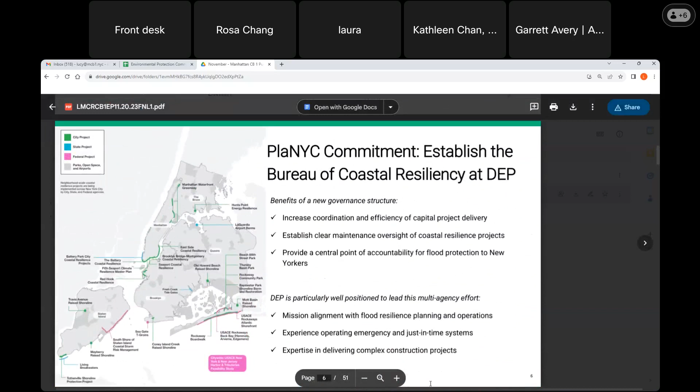Jordan, I hate to interrupt, and I don't want to set a precedent for jumping in with a question, but before we just leave this new established resiliency bureau, can you just give an example of how this is going to work?

Sure. So in areas where there is not an existing project, I think we made the decision that we didn't want to upset lots of ongoing work or years of entrenched agency knowledge. I think for the case of FIDI Seaport, for example, there's not a scenario where that moves over to DEP tomorrow.

Okay, thanks a lot. Yeah.

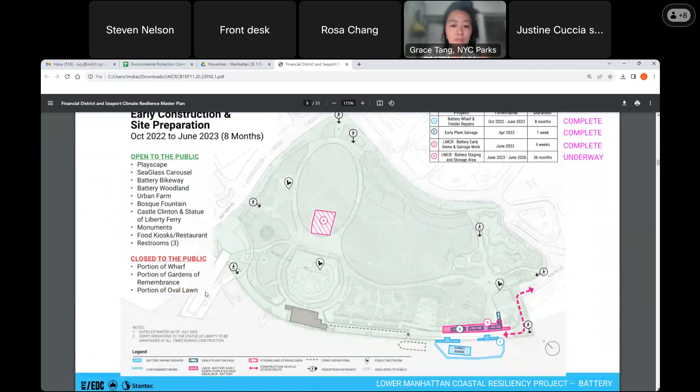Not going over this one? Yeah, that's what we were just - you want to do it one more time because I think that's helpful with the map up. Yeah, so basically, right in front of the View Restaurant, in the beginning half of this year, we...

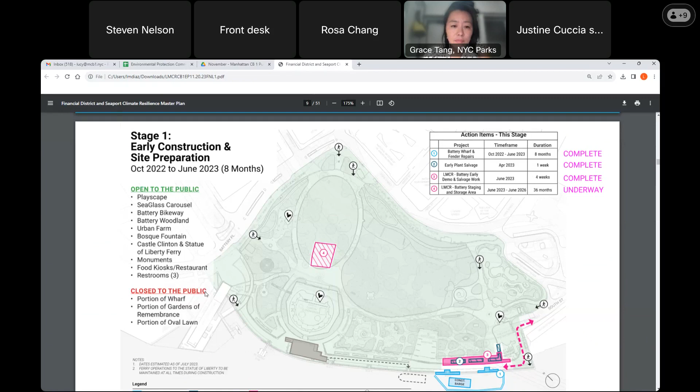completed some structural work under the wharf to bring those existing timber piles up to a level that will be able to service Statue Cruise operations. And then in that magenta area, we salvaged all the existing granite that was going to be in conflict with where those Statue Cruise operations were going to be happening during our first phase of construction. We moved those over into a small storage area we set up in the oval so we can have them stored, ready to be processed and reused.

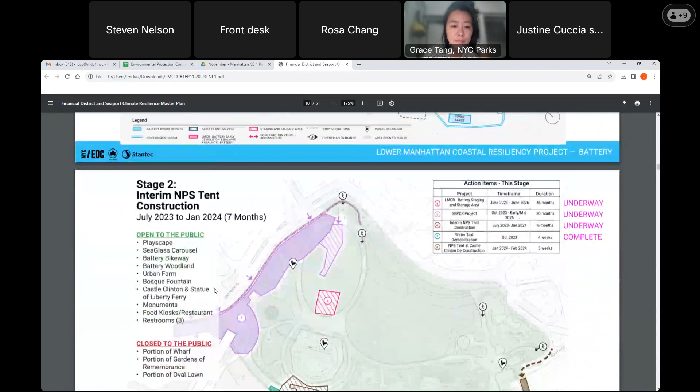The next slide is what you'll see out there today. This is from the middle of the summer and how the park will look through January when we're going to start construction. The National Park Service tent is underway - we're going to wrap up by the end of the year. We've had that staging area set up, the water taxi has demobilized, and the security operations are operating out of an existing tent.

One thing we want to point out is through all the efforts with the Conservancy and the stakeholders, we've managed to keep everything open during these operations, keeping some access to the wharf where we can, along with all the other amenities in the park.

Do you mind, because I think for most people they wouldn't be able to understand all of the legend that's being shown - can you just point to what everything is and we can go over it that way? Yeah, so this brown area here is where the current National Park Service construction is going on.

This is where we did the salvage work to get all the granite out so we can reuse it in the rebuild. This water taxi was removed in October.

This is the tent that's going to be eventually taken down so we can start our phase one work. We have our small storage area where we've stored the granite we've salvaged so far. We're going to be expanding that for the larger overall salvage effort beginning of this year or beginning of next year.

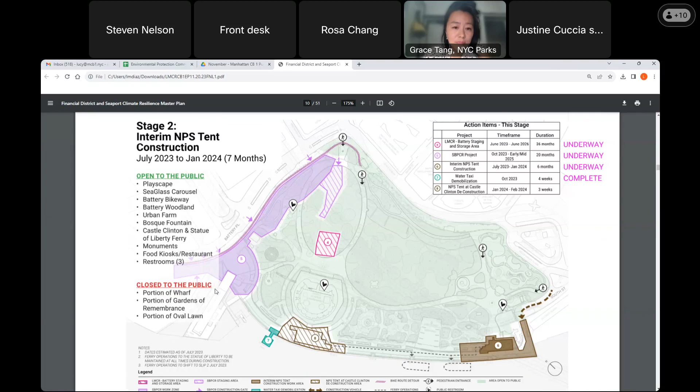I'm going to ask because they did approach the community board and ask for adjustments, but it looks like there's been no adjustments made for the National Park Service fencing and things like that. We can't really speak to that because it's not under our control from the National Park Service perspective.

For the conservancy, in terms of taking down some screening so we can keep the views open for the public when they're in the Bosque, we did make some adjustments working with the patio while they were out there.

Before we move on, this is just the early salvage work we were doing, taking all the granite capstones. We took these benches, we took the granite cladding along those walls, all to be repurposed in the new rebuild. This is just the storage area that was set up at the bottom. If you go to the next slide.

See the National Parks tent construction. This is looking at the tent construction from the Bosque area. They've kept their fencing back behind the Bosque, so the Bosque is accessible. This is looking from over by the playground, coming in. They kept the fence as far back as they can to safely do their work, but still maintaining access to the views. The front door.

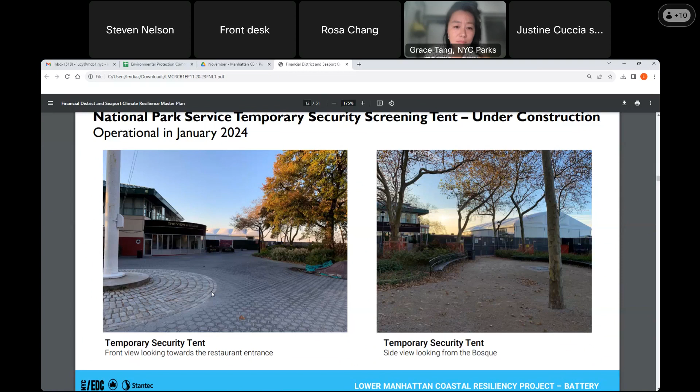Why don't we go through the whole Battery and then ask the questions, if that's okay.

Next slide. This slide shows what our footprint will be from January through the middle of 2025. This is us taking our first phase of work from the East Coast Memorial, the Pier A, starting the demolition of the wharf, then eventually pile driving, rebuilding the structure, redoing all the drainage in the pink area, and redoing all the hardscape and landscaping.

Just to point out, I know there are a lot more other colors than green right now, but for the most part we've managed to keep open as much of the area that was open in our previous phases of work, open to the public, minus access to the waterfront, because we're going to be ripping it out and rebuilding it.

Can you do the same thing you did at the other slide? This pink area is our first phase of work. Sorry, I'm not colorblind, I think that's brown. Yeah, the brown area is where National Parks is going to be demolishing their tent and eventually rebuilding it.

The hatched area here is the Statue Cruises operations out of that temporary tent being constructed right now in front of the view. The darker blue areas are the DOT resiliency project that we're coordinating their access throughout the park. There's some renovations to the field house going on by Parks over by the playground.

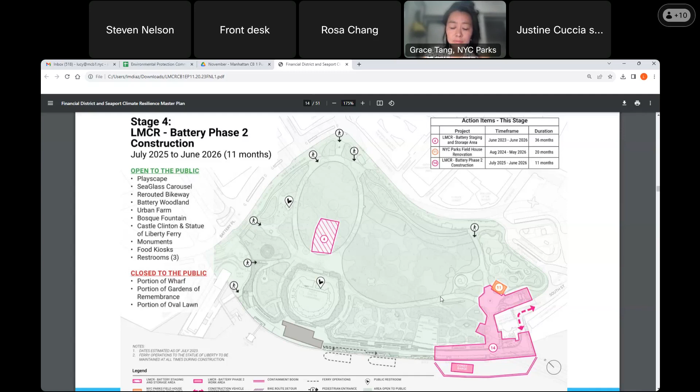We've been coordinating with the operator and Parks Revenue to ensure everyone's up to date. We'd certainly like to have an understanding about being up to date versus the ability to operate, which isn't necessarily the same thing. We're coordinating with them. What does that mean? They're negotiating.

Can't hear, sorry, say it again. Go ahead and repeat it. Sorry, I don't need you to repeat it. That's it. Would you like some water?

It will be very difficult for the restaurant to operate, if not impossible. The pink represents everything happening all at once, but not all of that activity will be happening at the same time. There may be a situation where they don't have safe access, or access but not safe access for fire department requirements. Also, it won't be pleasant to be there because of the heavy construction around it, so the operator may be unable to operate or may decide not to.

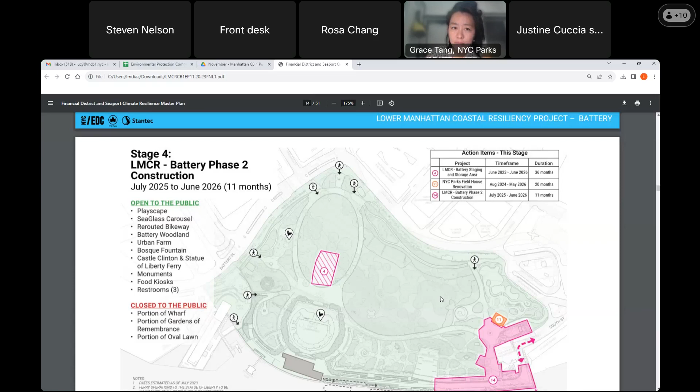In which case they're interested in negotiating some kind of alternate arrangement. We still need to work through this. I'm going to go back one slide, and then it's all yours.

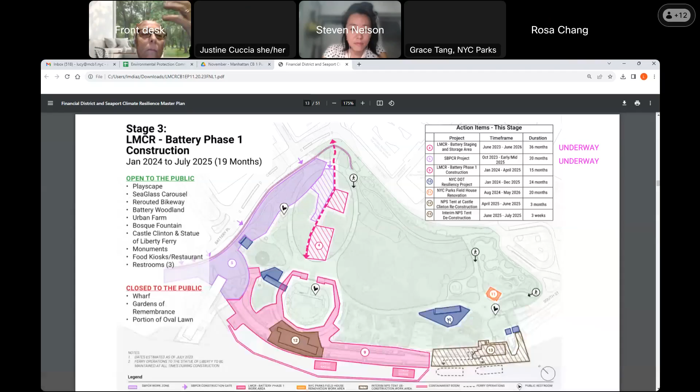Jeff, on the last slide, the blue area was described as the DOT resilience project. I'm sure you must have explained whatever that was in the past, but I don't remember. Based on the locations, it looks like it tracks the FDR battery underpass. So my first part of the question is, can you describe what that project is? And the second part is, will that underpass be closed?

Yeah, I think they were at our meeting a couple of meetings ago. We can invite them to present.

All the blue areas, is that all about the battery underpass, or just - I mean this building number 10, for example, they are all colored blue and they all say New York City DOT Resiliency Project, but I was curious what - those basically represent some of the different ventilation shafts that are within the park and where they have access to.

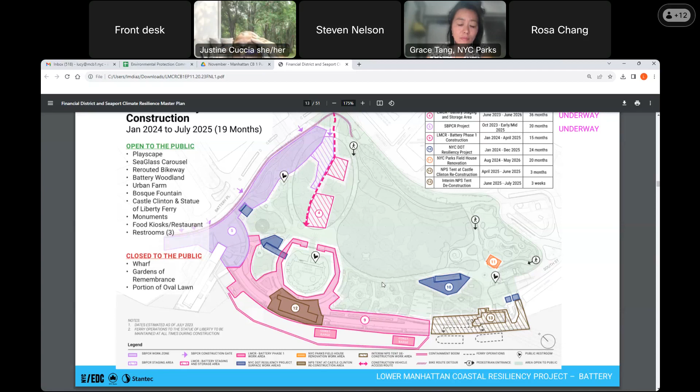Is this something - it's very difficult to read. I'm sort of curious why, given you're in construction, we can't see - let's say we'll set a construction plan - but some sort of construction document, so we understand what it is we're getting and where you're at in the process. These drawings are highly schematic, they're basically flat, we have no idea what really is being proposed, so I might recommend that on the next round you up the ante a little bit and provide construction documents that illustrate some of this, but it's very hard to know what a triangular shape means in terms of its height.

Also really missing from here, and to Wendy too, in addition to a more elaborate definition of all of these different colors, is pedestrians' path - how people are moving through this is completely illegible. I don't know, somewhere it's there, but I don't see it. I think it would be very helpful, not only here but again, made public - and maybe it is, I haven't been down in a while - but I just think we need to know how do we move through this space for the next 2 years and onwards. So looking ahead, that's going to be a critical part that's missing today.

Do you think you could send us those? I mean, you must have pedestrian flow - full circles with the arrows. I think what we're looking for is just a drawing of the whole park just showing the open pedestrian paths, that would be probably handy. And then maybe a construction document of the plan showing the different phases of the project, and what these things are - 10 and 12 and 13. Right now we're reading patch colors without any sense of really what it is we're looking at.

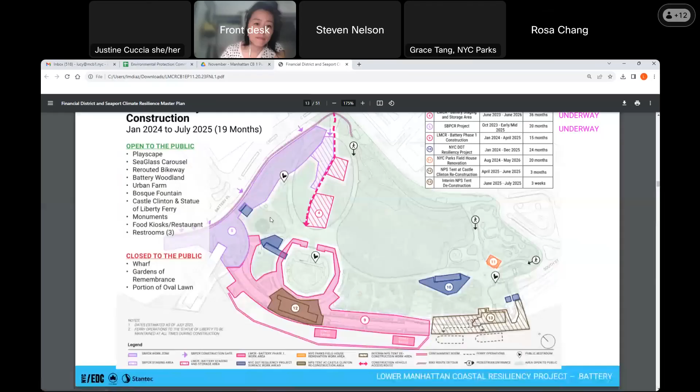So I was going to follow up on what you said, Alice, about identifying what's going on in the picture or schematic, because I'm still trying to figure out where the restaurant is. It's not 10, right? Where is the restaurant? It's over by where the bathrooms are, where 11 is, the field house. That's the bathrooms behind the restaurant there.

So if you look forward on this diagram, it's confusing how the restaurant's going to operate because it's in between what you see as a bathroom marker and the two blue markers, which are noted as surface work areas. Yeah, and there's just no way in.

No, I get that. And what I also don't understand is the pedestrian flow as put forth. You're going to have work at 11, work where the little blue dots are, and by 10. So where are people going to walk to get to the bathroom? That's in the south, the far right corner of the picture as I'm looking at it. And at the top, when you come in on State Street, you're going to have to go around all the construction to get to the bathroom. And again, with the signage, as Wendy was saying, it's a long walk to get to a bathroom and it's going to be very confusing.

So yes, paths are shown here, but we could certainly show you a diagram next time with lines traced on top of the park paths, showing where you're looking for people to go, and also identifying landmarks that exist. If they're going away or moving, that's fine to tell us. But at least for people like me who don't understand where things are, even though I'm familiar with the area, putting some labels, even a number or a letter, and having it on the side as a legend. Thank you so much.

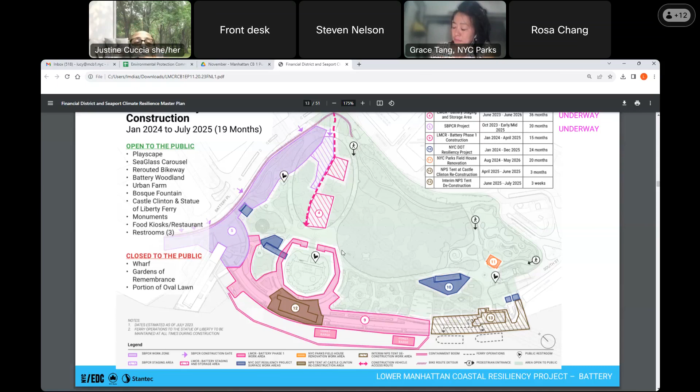Ask the battery team to do a separate presentation to this committee. We've done this in the past. Clearly we're going to need it here. There is a lack of information, that's understandable. It's great that you've included it, and I know you've adjusted things to do so, but I think we'll need more, and at that point we can dive a bit more into detail. So maybe in the not too distant future we can ask you to come back with the plans, with information that's missing tonight, and maybe entertain a few more questions, but still open for questions now.

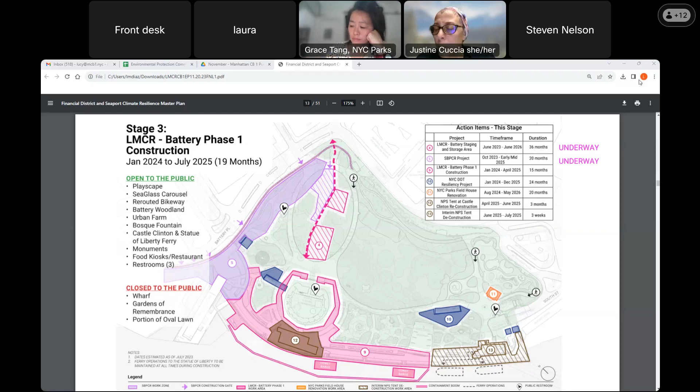It will need a lot of work to get it back to being able to grow plants and grass, because it's going to be really compacted, I'm assuming, with that heavy granite on top of it. Is that something where there could be a thought process to think about it as a rainwater collection area, or something like that in the future? I don't know exactly what that means, I'm not the right person, but since you have to do the work anyway, you're gonna have to do something. If we could think about it in a way so that water in a deluge goes there and not into our sewer.

Thanks a lot. I look forward to you coming back to this committee with a bit more in-depth discussion and a few more documents, but this was very helpful for us. Thank you so much for the presentation portion, and it looks like we're done with that, yes? We're interested, thank you.

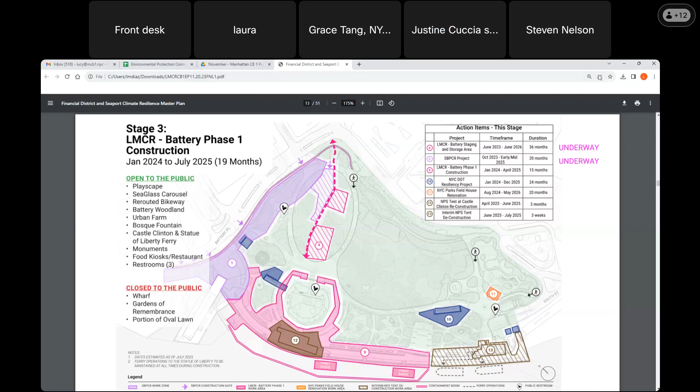Good evening, I'm Alexis Taylor, VP of Climate Resilience at EDC, and also the project director for the FiDi Seaport Project, joined by my EDC colleague Erin Tao. She is the deputy project manager and also leads our community engagement work. We'll be speaking tonight.

And then online we have Roni Deitz from Arcadis, the lead consultant firm. So I will pass it off. Thank you, welcome, great team here. So I'll do the update.

Louder, remember you're talking to the owl in the middle of the room. You guys need to talk louder, we can't hear you. Thank you, though.

So most recently we had the plans. There were several of you in attendance with us. This was our big public engagement, a real opportunity to widen the net of people learning about and informing this. I'm sorry, we can't hear you.

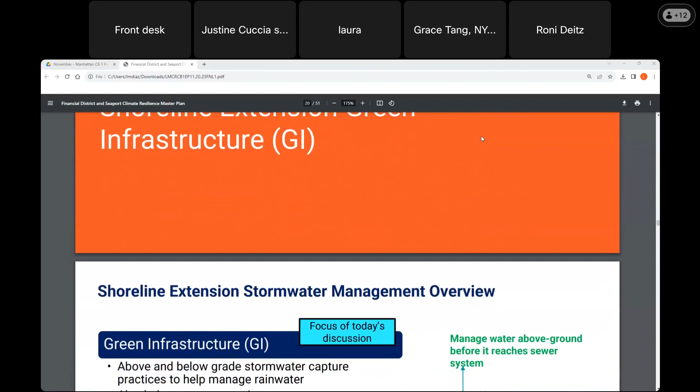So the first piece is just zooming into some of the shoreline extension green infrastructure. Before I dive in, I wanted to pause for a moment and talk about the two ways we're thinking of managing stormwater.

So the rain that falls from the sky and lands on our new shoreline extension, how are we going to manage that? Our top goal, shown on the right-hand side of the screen with those arrows up and down, is to manage as much water above ground as possible before it reaches a sewer system. Our best way to do that is through green infrastructure practices, and I'll talk more about what those look like in a few slides. The great part is that for the most part we can absorb water back into the ground, and we can also help pre-treat that rainwater before it enters any sewer system or runs off back into the East River.

Once we reach a point where there's too much water, exceeding a certain intensity or total duration of rainfall, the water would enter the sewer system. What's really important is that the last thing we want to do is exacerbate the existing combined sewer system in Lower Manhattan, the existing pipes that take water from homes, businesses, and downspouts to the wastewater treatment plant over at Newtown Creek. Instead, our goal is to capture that water and redirect it through a new separate storm sewer system below ground. This is also often referred to as an MS4, a municipal separated storm sewer system, so if you hear me say that, the two terms are interchangeable.

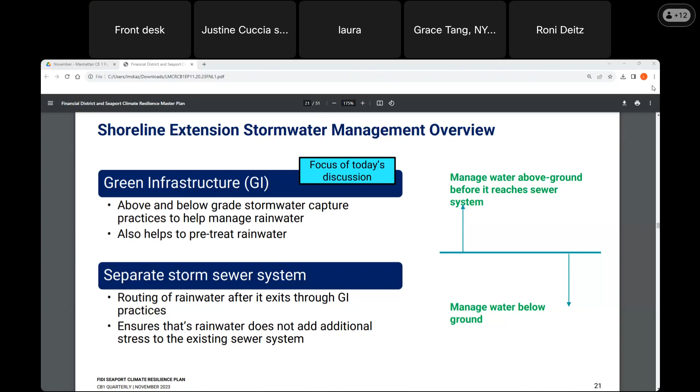It's still important to think about pre-treating and doing everything we can to retain that water. But whether it's regulations or best practices, we're really focused on that quote dry side of the flood protection. Let's go to the next slide.

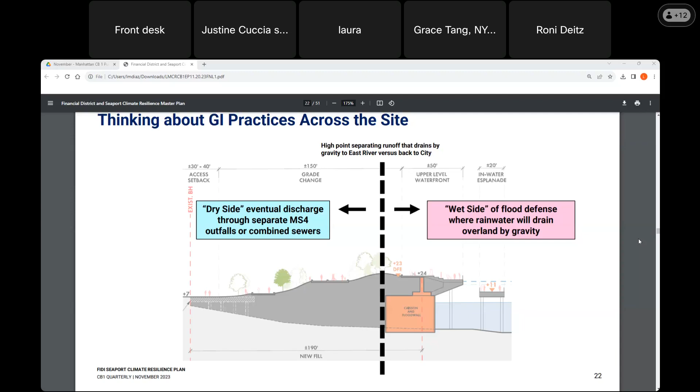Talking about regulatory requirements, I won't spend a ton of time on this tonight, but as we design the shoreline extension and the stormwater sewer system, we have to comply with what's called the Unified Stormwater Rule. This applies to any construction permit disturbing more than 20,000 square feet, and there's a requirement to manage the first 1.5 inches of rain. Our goal, though, as part of this project, is to maintain and retain more than that, minimizing the amount that runs off, and to think about water quality and peak reduction runoff goals, both during and post-construction.

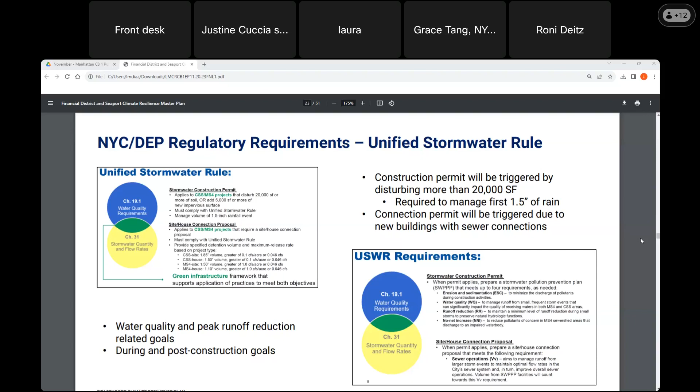If folks want more details on the Unified Stormwater Rule, we can share these slides for you to read more. The regulations really focus on preventing stormwater pollution during construction, and on managing rainfall on site to minimize stress on the sewer system. So if we keep going, this Unified Stormwater Rule starts to lay out an overview of green infrastructure practices.

There's also evapotranspiration. The best practice to think of there is a green roof, where water is captured and then evaporates back into the atmosphere.

There's detention, where water is temporarily stored and released at a lower flow rate. Detention tanks are another green infrastructure practice, below grade, that can help take water and return it back to the sewer system when it has capacity.

And then the last piece is reuse, thinking about when water is captured and repurposed for, say, a non-irrigation purpose. This is something we're looking more into as part of our energy and sustainability strategy. We've spoken about that on prior calls, but we're really excited to think about potable and non-potable water reuse on site.

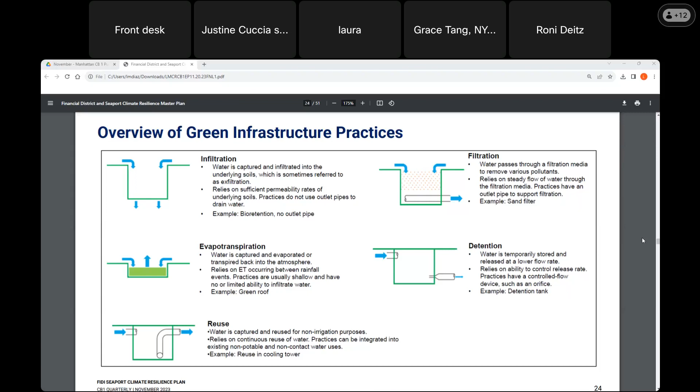If we go to the next slide, I wanted to call out infiltration versus filtration, because this is a lot of what we're really looking at right now, given how broadly we're thinking about that shoreline extension at the moment.

We're starting to think about how we can either take that storm and rainwater and infiltrate it into existing soil, or use filtration and think about those types of materials we'd want to use as fill, designing it so it can pre-treat stormwater prior to returning to a sewer system. That's the two ends of the spectrum we're looking at, and we'll see what these actually look like on the next few slides.

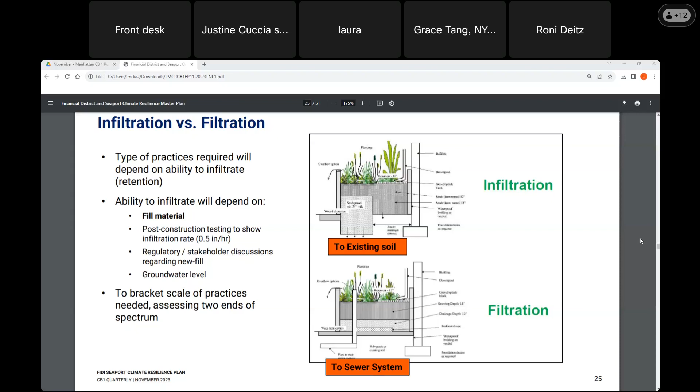So if we go to the next slide. To dive into this study, what we've been doing is breaking our really large study area out into a couple of different zones, because the study area is so vast.

We're looking to see how, first and foremost, we can capture, store, and reuse stormwater on site. We think it's really important that where we can retain that water, we certainly do so. We're also looking at opportunities to capture additional water from the FDR Drive, and thinking about ways we could redirect and take some of the water that currently falls in the upland areas of Lower Manhattan and give it a new home.

And then we're thinking about flexibility of practices across the site. Erin mentioned that too, in terms of wanting flexibility in our open spaces, and green infrastructure can certainly help accomplish that. But we also recognize there are challenges and trade-offs, and those are some of the design considerations also noted on this slide.

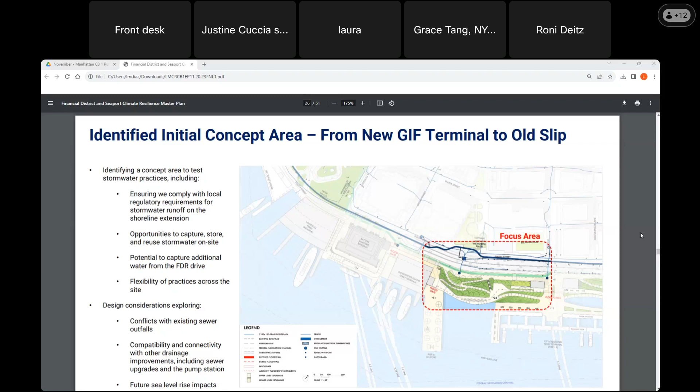Here are some of the different stormwater management strategies we're starting to look through: green infrastructure and a waterfront greenway along the bike corridor. As part of the master plan, we're aiming to pull the Manhattan Greenway further inland, help separate bikes from pedestrians, and look at how we can combine green infrastructure practices with that new greenway.

We're also looking at permeable paving and storage tanks under the landscape, thinking about where we can retain and detain water between pavers, and finding areas to store stormwater under the landscape. We're also looking at water squares or surface level detention for heavier rainfall, like cloudburst-type events, and where we can integrate these surface measures into the shoreline extension.

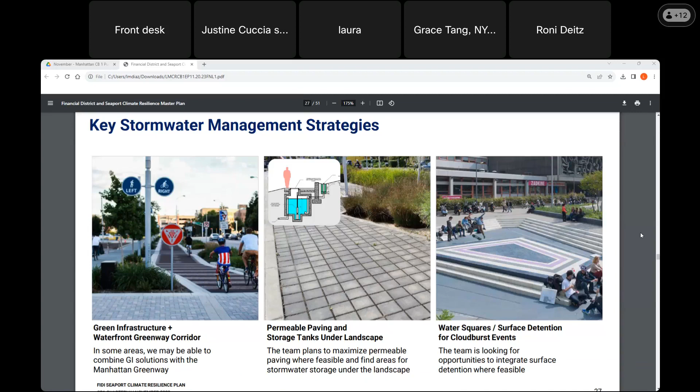A few more examples: green roofs. We're looking at the roofs of all the different public buildings, ferry terminals, you name it, on the site to understand the trade-offs and think about whether we can do green programming or other uses we may want to accommodate on those sites.

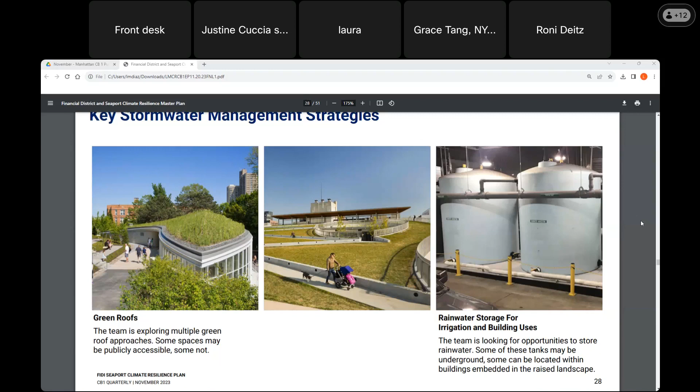We're also looking at rainwater storage for irrigation and building uses—a picture of some tanks that could be located underground, within buildings, or embedded in a raised landscape, thinking about how we integrate these types of infrastructure practices to benefit the site.

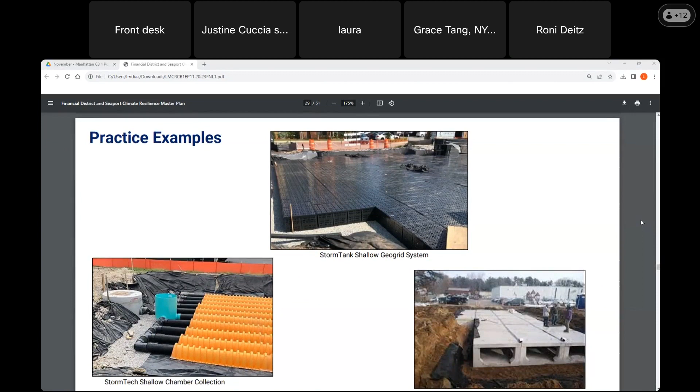These are some example photos of these practices in the field—a few different ones. StormTank has a shallow geogrid system. StormTech uses shallow chamber collections and precast stormwater cisterns. These all point to the different innovative measures that exist to manage stormwater on site, ones you wouldn't even know are there because they're beneath the program. These are the types of practices we're looking to accommodate into the site.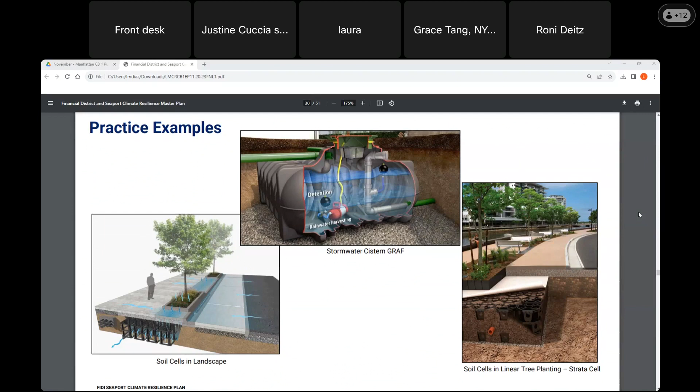A few more storage cross sections show detention or rainwater harvesting in a stormwater cistern, soil cells in landscapes, and under linear tree plantings. You can see the different strata and filtration technologies we're looking to incorporate.

That's what we're up to in the green infrastructure space. But I wanted to briefly hit on parallel conveyance improvements—what it is and how we've been looking at it across the site.

Parallel conveyance is a term that refers to the management of stormwater. It helps create a parallel pathway, basically giving additional redundancy for water to get to the interceptor. The simple way to think about it: in your bathtub, you now have another way for water to drain and get from one pipe into another.

That's what the concept drawings on the right are trying to show. In the existing system on top, all the water flows in that black line, the combined sewer inflow, going to the regulator and then working its way to an interceptor. In the proposed system, shown by the red line, we have another way to take water from that CS inflow, the combined sewer inflow pipe, and get it to that interceptor.

And by getting water into these interceptor inputs more quickly, the goal is ultimately to reduce flooding that you may see on your street, just purely due to the limitations of the large interceptor pipe itself. I know it's technical, but I figured it was helpful to talk through this concept in terms of what we're trying to accomplish, and why parallel conveyance ultimately frees up additional capacity for us to get water off of streets into an interceptor pipe, into a wastewater treatment plant sooner rather than later.

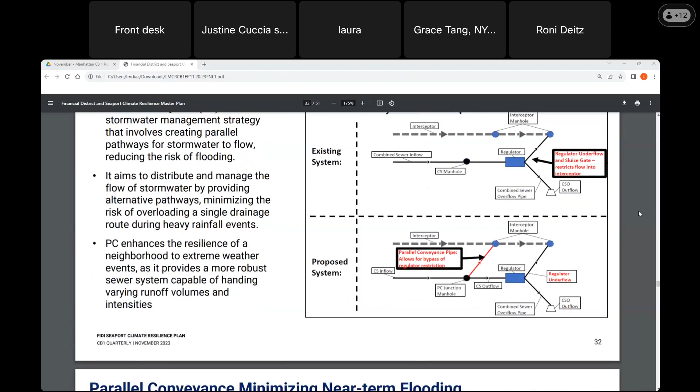So I think there's one last slide if we keep going to 33. As part of our work completed last year, we started to look at where parallel conveyance, these additional pipes, could help minimize flooding within our study area. This was without coastal defense constructed, without future sea level rise, without a pump station in place. We looked at one design storm condition, a non-hurricane event, but a really heavy rainfall event, the 100-year rainfall. It lasted for 3 hours. There was no surge. We used present day tides.

And what we ultimately learned was that parallel conveyance, adding in these additional pipes, could help with taking water that currently collects on the streets during heavy rainfall events, getting it off those streets and bringing it into the interceptor pipe, ultimately to be treated before it's discharged.

The Arcadis team worked with EDC and we put together a planning and design BRIC grant application. As part of FEMA's Building Resilient Infrastructure and Communities program, they have grants that help with capital to construct projects, and they also have grants that help with advancing planning and design. We applied and were selected for further study as part of a planning grant to help further our understanding of how parallel conveyance can help minimize near-term flooding in our study area.

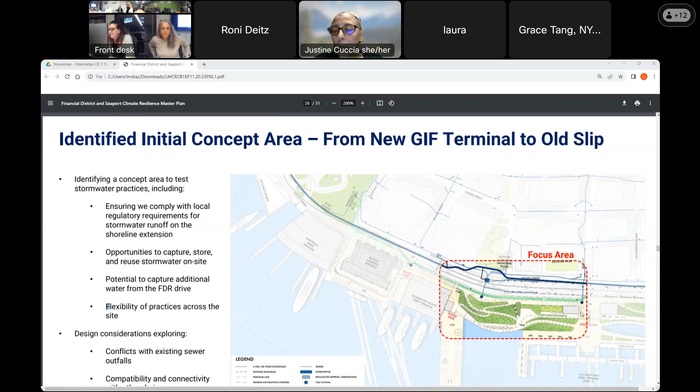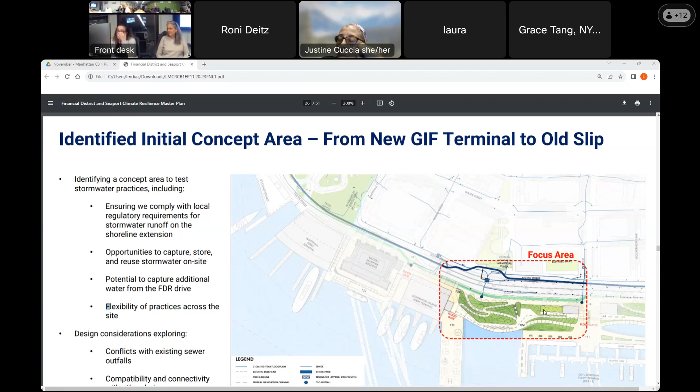That is right now one of the locations that we are holding for the pump station. As you can see in size and scale, it is not terribly large. We have right now demonstrated a green roof on top of it, so that building would actually go a little further in width, but our hope is that it's really integrated into the program of the site.

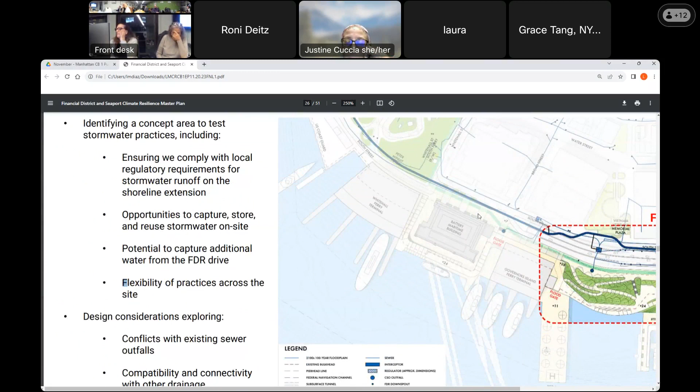Because it is something that's only going to be used during extreme weather events, we need to take that opportunity to think about the program that can be integrated so that it makes the best use of that site.

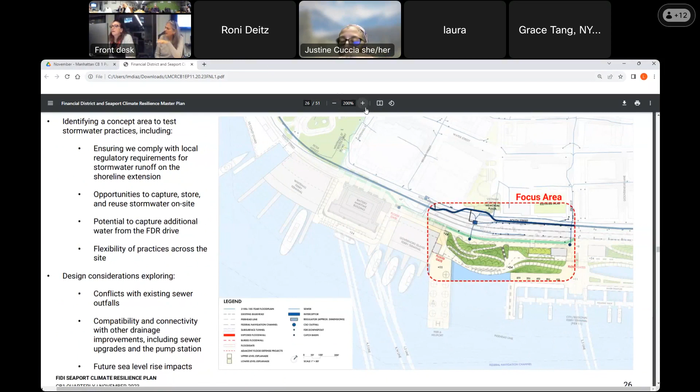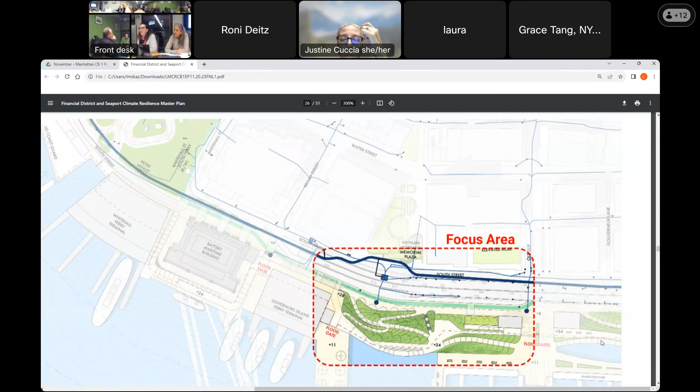There'd be one pump house for the entire site. I think the question is whether there's only one pump station, and yes, there's only one for the entire site. That's why these parallel conveyance improvements you won't see below ground are so important, because we have to pull water from both the north and the south to ultimately get it to that pump station.

During extreme weather events. Lastly, what is the scale? Of course the height we would know, but what is the square footage of that and how high is it? Right now it's shown as 2 stories, and I apologize that I don't have the square footage off the top of my head. But it's about two-thirds smaller than the Manhattan pump station, just for size and scale. It's a much smaller facility than what is further north.

And if we use some of the street widths for comparison, it's about half of a city block.

Oh, the audio went out again, unfortunately. I'm not sure what you're talking about. Now I can hear you. Sorry.

What I wanted to ask is about the mayor's press announcement on Monday with these beautiful drawings of what potentially Pier 6 would look like with alternative forms of transportation plus car parks for the Blue Highway along Pier 6. It does not look reflective at all in the focus area that you have here. So I'm curious, because it's beautiful, we're super excited for anything that goes green, and anything that's less diesel.

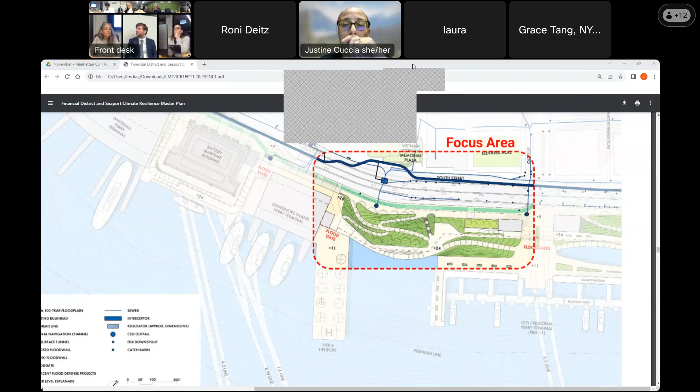I do want to address that, and I know Roni will give a maybe more diplomatic and eloquent answer. I think it is critical and required for this overall system to work. Without it, water accumulates on the interior, kind of like a bathtub, and we would not get our FEMA accreditation. We would not make folks safer. So yes, it is a significant structure, but it is necessary to the functioning of this effort.

We do have the benefit of effectively new land to design it in a way that it doesn't feel like a massive structure, and there are ways to embed it within the landscape. I'll let Roni give the more nuanced answer on how she's thinking through that. I think Jordan gave a perfect overview.

Just to say, because we have an opportunity here knowing we need to create new infrastructure, we get to plan with that in mind. The design team has been working closely with the engineers to figure out how best to integrate that into the landscape, whether that's thinking about how we program green roofs, or maybe there's an opportunity to have windows looking into a pump station for educational opportunities as you're walking on the top level of that path.

Our goal is to really think about how we make it an asset, how we make it part of the story of the shoreline extension, but also ensuring we're programming it in smart ways so that it provides value to the community even during the hopefully 99.9% of the time when it's sunny or just lightly raining and we need open space. But I think Jordan said it perfectly, this system does not function without this pump station, and it's a critical component of how we will ultimately achieve flood defense.

Makes sense, thank you. So follow-up question, and I think your answer is just going to be yeah, that's right. I was going to ask, when you were talking about planning for pumping water out, planning to the 5-year rain event, not the 100-year rain event, I imagine any pump house planning for a larger rain event would only have to be that much bigger.

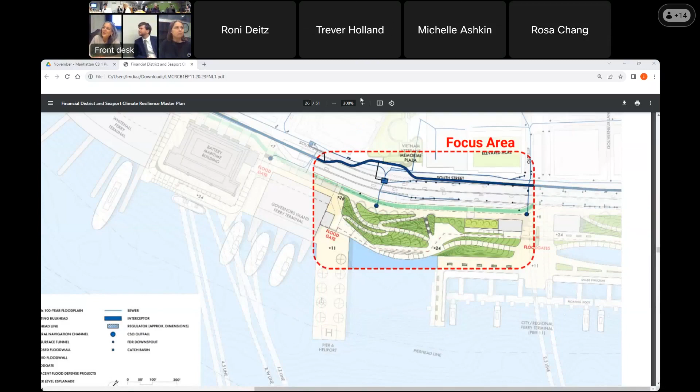Okay, so let's—great, okay, so introduce yourself again and welcome. Thank you, and thank you everyone for the usual marathon sessions. This is awesome, we love it. Yeah, mic is in front of you. Please don't pull on the black ones. I have one, great, I will not.

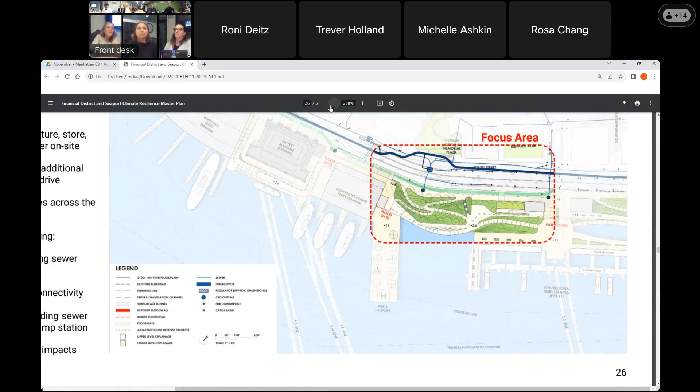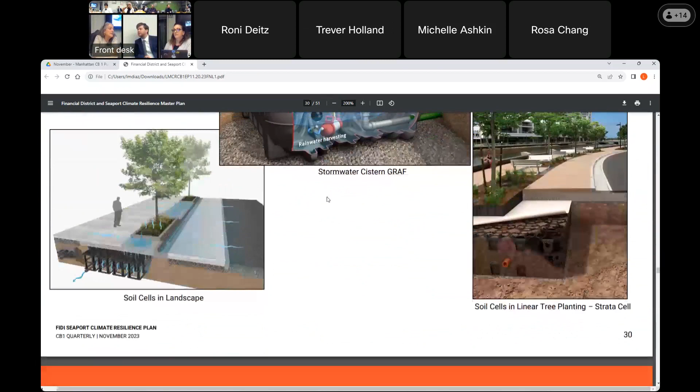Get started—one question to you. How many acres are we talking about for the Seaport Master Plan? I think it is in the 10-acre range, maybe a touch below, maybe 9 to 11. Does that sound right, around 10 acres? Okay, a little bit, great. I was just curious, I'll follow up with that later.

Okay, go ahead. Hi everyone, I'm Mark McClure. I work under the Program Management Construction Management Joint Venture for the East Side Coastal Resiliency Project. I'm representing them as well as DDC. I do community engagement for ESCR as well as the Brooklyn Bridge Montgomery Coastal Resilience Project, which is under the LMCR, as I'm sure you're all aware. Go to the next slide.

So this is just an overview of what I'm going to touch on tonight: project status, some new construction photos, what the upcoming activities are, and then a list of resources. And I know we're just outside—or sort of just touched CB1—so I'll be brief.

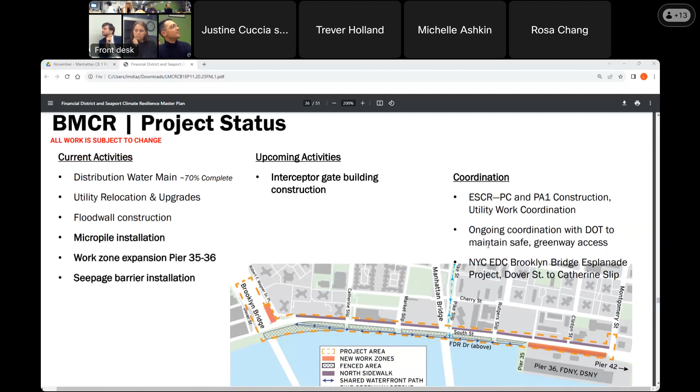So this is a map of the project area in the bottom right. As you can see, it goes between the Brooklyn Bridge and Montgomery Street, hence the name. We have been focusing, up until this point, on distribution water main work—replacing the 100-year-old 12-inch distribution water main, which connects from the trunk main to your buildings. We're 70% complete with that work. There's also utility relocation and upgrades: as with the other projects mentioned, there's a parallel conveyance component to this project, and in order to get down to those sewers, we have to relocate all the utilities out of the way. When we relocate them, we also upgrade them.

Flood wall construction has started. While most of this project is a series of flip-up floodgates, which I'm sure you've all seen renderings of, there is, at the north end and south end of the project, actual physical flood wall, which I have renderings of on both sides. Micropile installation is the installation of piles that will support the flood protection system. We also just started seepage barrier installation, to prevent water from coming under the flood wall. And soon we will be constructing an interceptor gate building, which I also have a rendering of.

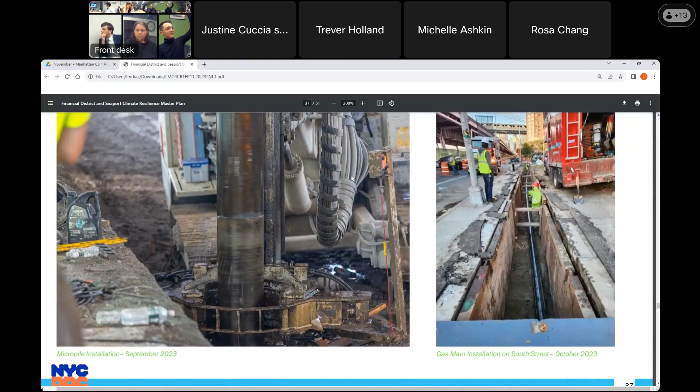So these are some construction photos. The image on the left is the micro pile installation. Because the FDR is above the project area, they can't do typical pile driving where they hammer piles into the ground with a large machine that you may have seen if you go near East River Park. It's just a really tall hammer essentially that drives them into the ground.

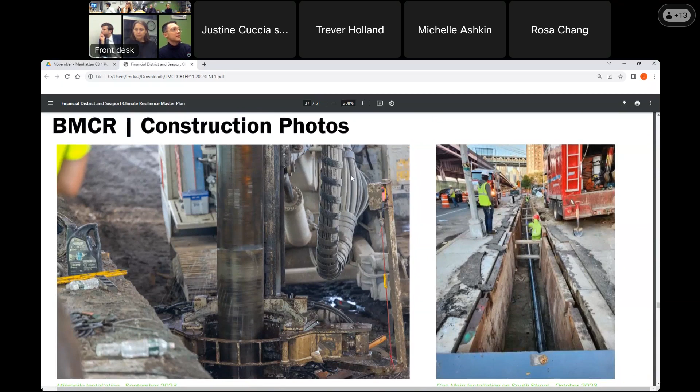So they use micropiles and drill them into the ground. And then you can see there's water to make sure that there's not a lot of dust being created as they're doing this. The one on the right is a gas main installation, where they were relocating the gas main from the street into the sidewalk.

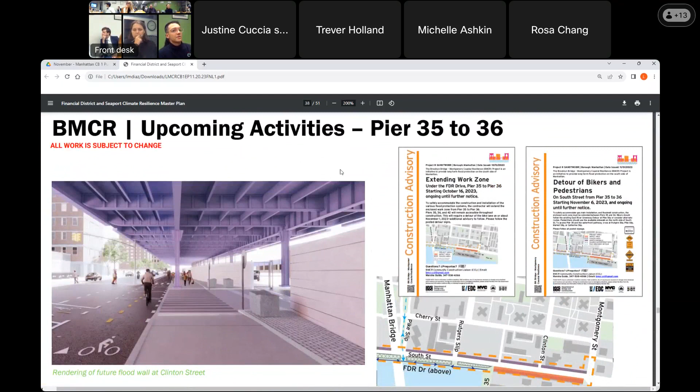The newest activity we have so far, which is the last work zone expansion we're doing, is that they are expanding the work zone under the FDR, between what would be Clinton—but it's just a sidewalk there—and Montgomery, to build this flood wall that you see on the left. This will replace the fence that currently goes along the sidewalk at the FDNY, DSNY, NYPD facilities up to Pier 36. We did have to close the bike lane there and the sidewalk, which usually had cars parked on it anyway from the FDNY and DSNY facilities, but in the future there will be built environment pieces that also try to deter people from parking on the sidewalk.

What's the picture of—is that a car or a parked vehicle that's on the water side of the wall?

So that's, I believe, the DSNY or FDNY—they have a parking lot. DSNY has a collection facility where trucks bring all the waste that's been collected, and in the middle of that is an FDNY facility, mostly EMS with ambulances. We've been coordinating with them to figure out where we're taking some of their parking lot, so we've had to make sure they can reallocate those vehicles elsewhere so it doesn't interrupt their operations. But that would be, I believe, a personal vehicle, because they have parking space in front of their buildings for personal vehicles.

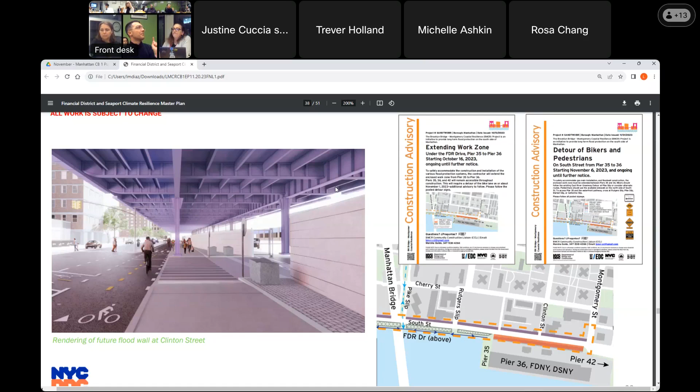The DSNY is, I believe, moving some of their operations to another location completely—they're still working out the details. But we've told them, and they're well aware, that we don't want them parking on local streets. That was brought up at CB 3 as well.

So this is a rendering where we just expanded the construction zone, mostly in the DOT yard right there under the Brooklyn Bridge. This is the Interceptor Gate building, which when completed will be managed by the Department of Environmental Protection. It houses the controls for the parallel conveyance system associated with BMCR, and provides access for DEP workers to inspect the Interceptor Gate and the chamber.

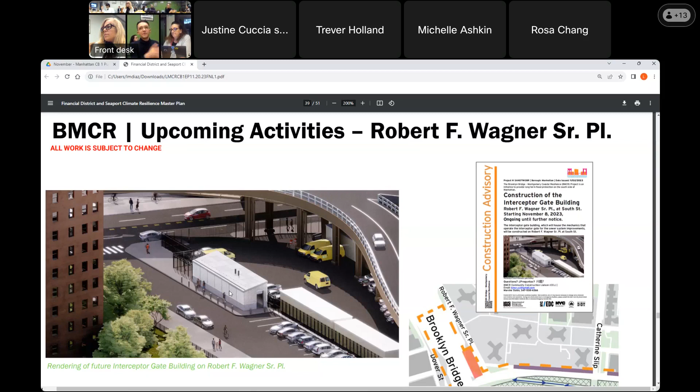Is that the orange part we're looking at? The orange part on that map is just a small, about 200 feet of Robert F. Wagner Senior Place, north of the bridge at South Street. Now that we've taken these two areas, all of the construction zone is essentially either within those fenced areas or in the street, since we have to do a lot of utility work and the utilities are under South Street. The two white structures are already existing—those are the trailers that DOT works out of in that location.

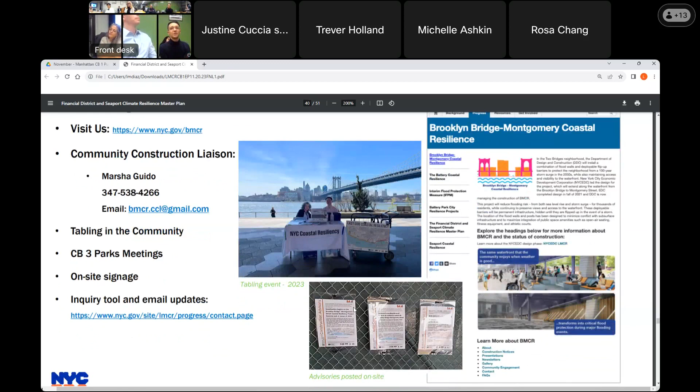We just launched an inquiry tool, so if you have questions or concerns about something on site, you can submit it through our inquiry tool, and then sign up for our weekly emails, which come out on Fridays.

Would you say for the record how people can find the inquiry tool? Yes, if you go to nyc.gov/BMCR and visit our contact page, it's there. You can also just sign up to receive emails, since we send them through that same system, similar to the one used for the East Side Coastal Resiliency Project, if anyone's on that list. When filing an inquiry, you can also geolocate where your question is, if it has a location.

We're going to have to move things along because it's getting late and we have a lot to cover, so I'll ask that questions be specific, not repetitive. The one question I'd like to launch with, the obvious one that'll be asked all the time at this board, is how these two projects are interfacing at that juncture at the Brooklyn Bridge, Gotham Park. Have you answered the community's concerns and suggestions from folks like Rosa Chang in terms of what the next step is? Have you been able to accommodate some of the concerns this community board has at that spot? If you want to let us know what it's going to look like, it would be a good time to do it.

I think that rendering does give a sense of where the projects meet up, at least from the BMCR side, for folks. The projects are designed to be independent, so each comes online and serves a purpose, meaning they will all have tiebacks, and that includes the effort here. It's a little harder to see the staking of the flood wall, but it goes through.

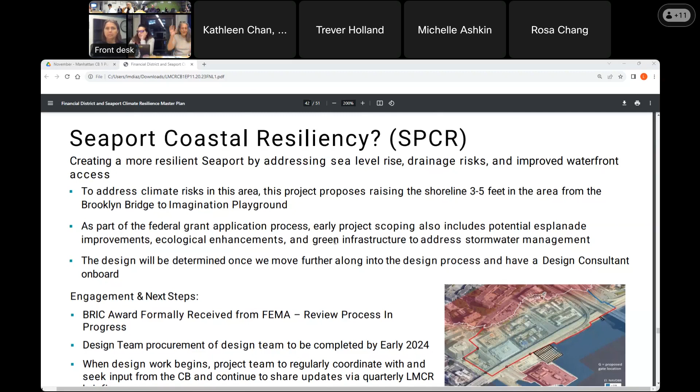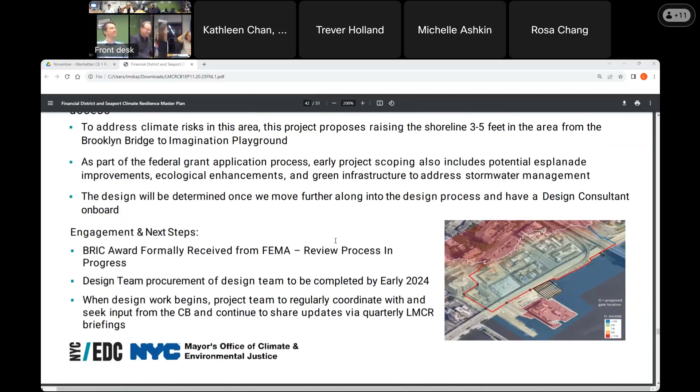All right, thank you so much to the Lower Manhattan Coastal Resiliency Team. Are you all leaving, or staying for the Battery Park City Authority? EDC folks will be leaving, we'll leave it to our friends at the authority. Thank you so much, it was really, as always, edifying and tremendously generous with time. We'll have follow-up. I think it would be great to get a meeting on open space, and the battery, like we talked about. Okay, so thank you all.

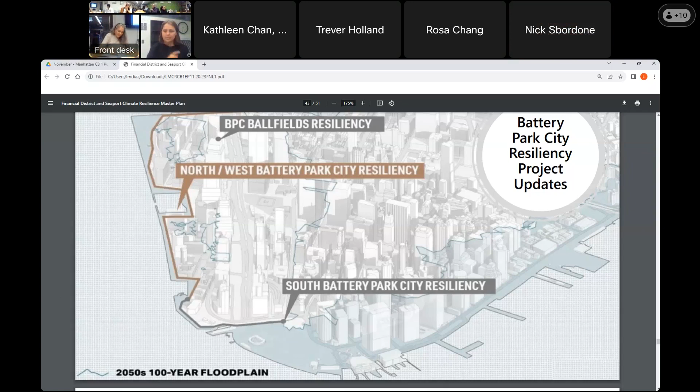So this is just to say that we are under construction right now with phase one, which is Wagner Park, our site pavilion project, and phase two is also under construction, which is Pier A, the Battery, and the interior drainage portion. We expect this is still on target for early to mid 2025.

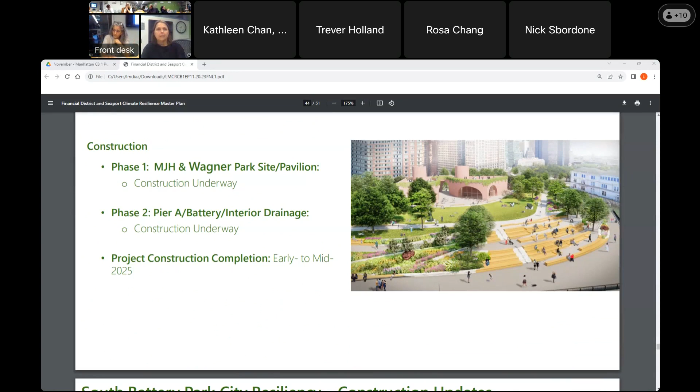How big is that? Always wanted to know. Oh gosh, do you remember? Someone please get the number for us. How many gallons? I want to say it was some millions of gallons, I forget — just get that, yeah. Okay, sorry to interrupt, go ahead. And can you put a sign up that it's coming? Nobody knows about it. No, that's a good point. I agree with Wendy, when people don't know... but go ahead, we'll do all that after.

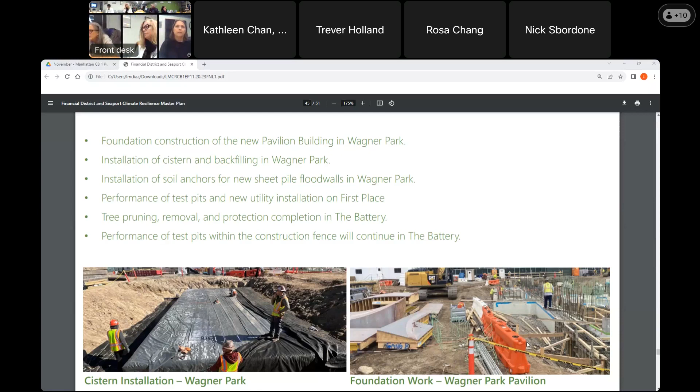Where are the sheet pile flood wall anchors? Is there no picture of that? We didn't include that photo, but we have lots of construction photos if you would like to see them. There's also a video on the website.

If anybody has a question, I'd like to know how many trees were removed. Nick, do you have that number? Okay, you can get back to us on that.

Also, how many gallons in the cistern? And can you describe a little what's going on at Pier A exactly and where you're at in the process? It was a little unclear what's going on in that plaza in front, since that's one of the most acute areas of flooding that happened during Sandy.

Just curious where you are in the process and what's being done now. To my knowledge, the trees that needed to be removed have been removed and the fence is up along the battery, and test pits are being undertaken. This is the Pier A plaza we're talking about? What does the test pit mean exactly?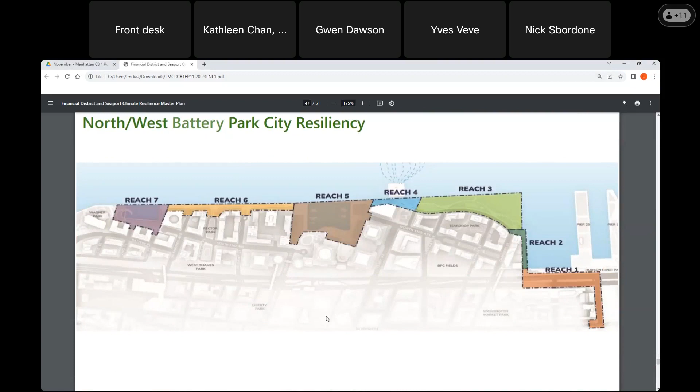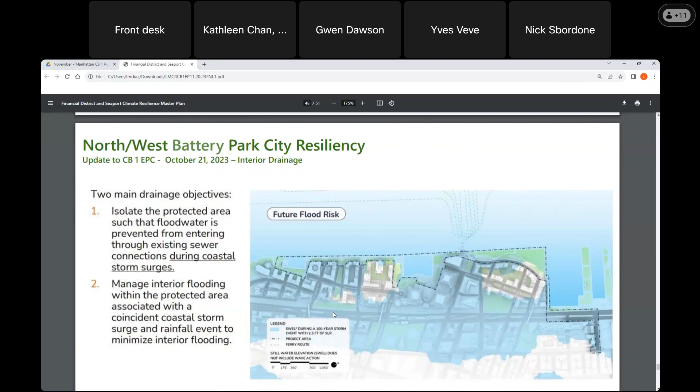This is a reminder that there was a meeting here last month where we talked about the interior drainage and the two objectives: to prevent floodwater from entering existing sewer connections during a storm event, and managing stormwater during a combined surge and rainfall event. Next slide.

This is the location for the pump station at Stuyvesant High School. Peter is on the line, so we can talk about that in questions. Does anyone have questions?

Okay Wendy, that was a great presentation. One thing I want to make sure we understand is that only the box to the left, where the elevator is, is going to be substantially above ground, and the rest to the right is underground and won't be seen when the project's over. Is that still the case? The pump station next to the current elevator—that's not above ground either? Right, we're still designing this. Is Peter on?

Yeah, would you like me to respond to that? The current plan is to keep the pump station below grade to the greatest extent possible. However, we haven't gone through coordination with DEP yet. This will be DEP's pump station, so DEP will, through the design process, define access and egress. So the intention is for this to be a below-ground pump station, but we have to work with DEP to determine their access requirements, as they want to move people in to operate it and move equipment in and out. Those details are to be determined through the design process with DEP.

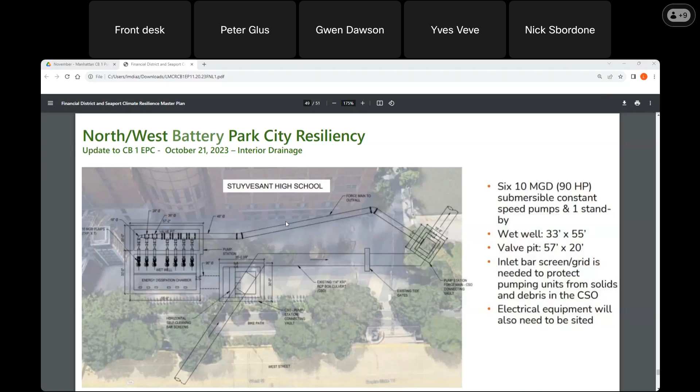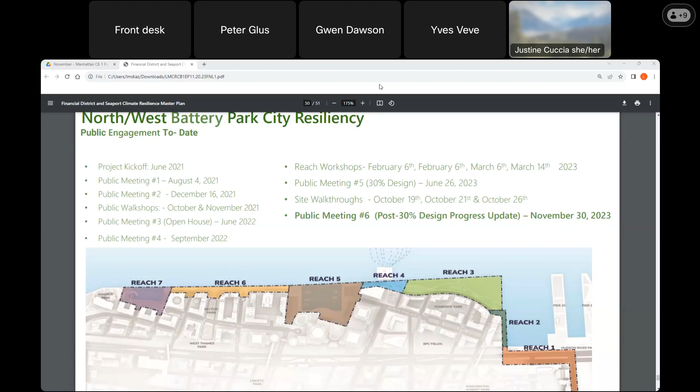This slide illustrates how we're going to set up this meeting. First, we'll have a presentation focusing on the feedback we received and on the three reaches I mentioned: reach 1, reach 2, and reach 5. Then we'll break out into topic tables for one-on-one ask-the-expert situations, with three focused tables: tree/landscape considerations within the project, risk and adaptability, and Battery Park City resiliency projects and lower Manhattan coastal resiliency.

We will be live streaming this as well and answering Q&A. There will be someone manning the Q&A online in parallel with the in-person tabling.

I have a question about the timing. The previous big meetings had duplicate sessions back to back, and I couldn't tell with this one - it starts at like 4:30 or something and runs to 8. Is that a single presentation, or is that two of them again within that time?

It's a single event. So what's the breakdown on the time? Because you said that people can call in.

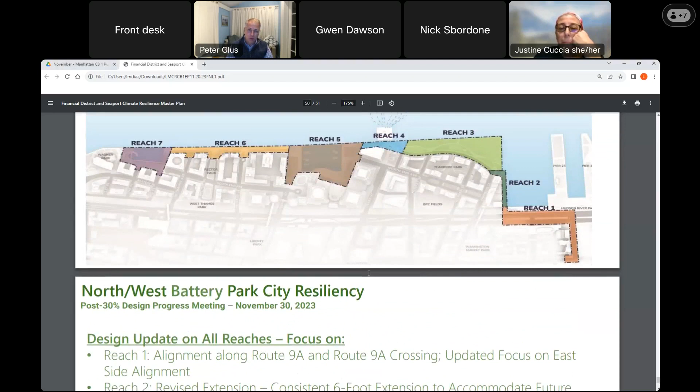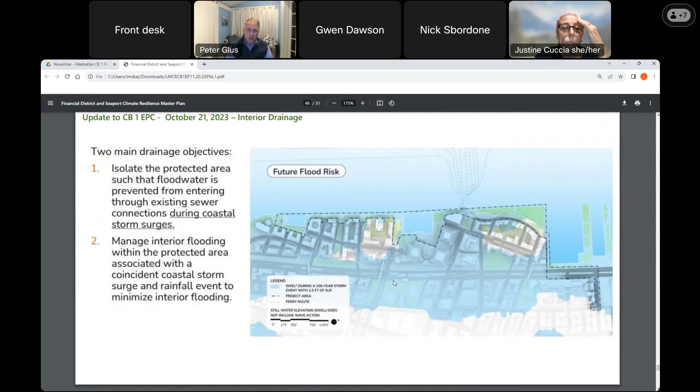My dumb question from earlier is, unfortunately I have a work engagement the night of the 30th and I can't come. I'm trying to see what component I'll be able to see, but the hardest part, to Tammy and Alice's point, is that these dates get put on the calendar two months minimum in advance, and for those of us who have calendars, it's difficult. So I am incredibly interested and I really want to hear all the details, and I know I'm going to miss them on the 30th, and I apologize for that. So even if you're just describing them, I'd love to hear more about whatever the PATH train bridging, I think you called it, what that means. So I'll take whatever you can give, whenever you can give it. I'm sorry I won't be able to see all of the good work you're doing - I have to go watch it later at another time. I won't be able to be there in person. So go ahead with the bridging or whatever.

Yeah, I mean, I could just take a minute here and go over some of the technical highlights quickly of all three. Gwen said on Reach 1, we've pushed it to the east, and we're right now trying to figure out how we're going to be crossing Harrison and 9A. We have a number of technical options on how to do that, and we're in the process of researching those options, balancing visual impact, reliability, time of deployment, et cetera, for those crossings.

Gwen mentioned on Reach 2, we've established that the new design is going to be 6 feet out from an adaptability perspective. We're in the process of laying that out right now, and continuing to talk with the state, with HRPT, and with the Army Corps and all the federal partners.

On Reach 5, we're continuing to talk to the Port Authority about the design of the bridging structure. The Port Authority is a significant stakeholder for us because we're protecting the PATH tube. As we finalize the outline of our structure, we'll better know how it's physically represented in that reach right outside of Pump House Park. We're trying to balance all the issues at the current choke point in front of Pump House Park, and we hope to show something more clearly illustrative of the choices we're trying to make on the 30th.

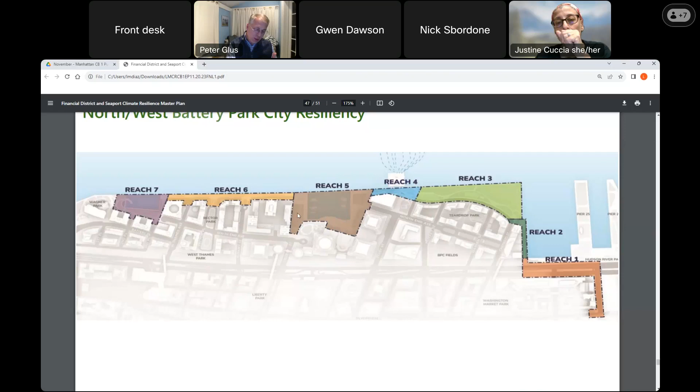What I mean by the choke point is the esplanade there has a relatively narrow dimension, so we as a design team refer to it that way. Basically the Esplanade is very narrow at that point, right outside of Pump House Park. If you walk in front of Pump House Park with the water to your right and the park to your left, that section of Esplanade gets narrower relative to the rest of the Esplanade and the authority's property, since the rest is so large. It's not very narrow at all, but it's narrow comparatively. Yeah, that's correct, that's a better way of saying it.

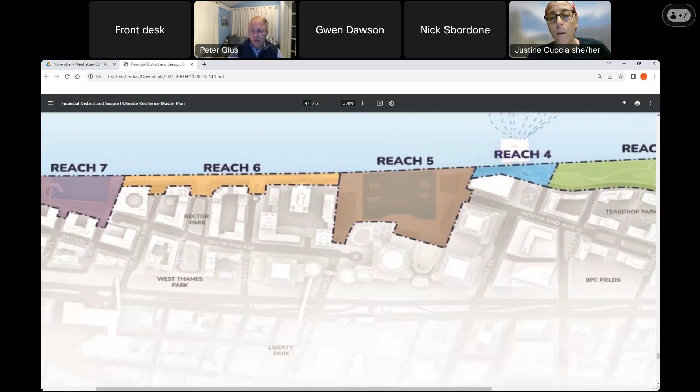Going back to Reach 2, when you're saying 6 feet out, you're talking about building out the Esplanade to the north, to make it wider, correct? That's right, yes.

I'm hearing that for Reach 1, by moving the alignment across the street by BMCC, you are moving away from the wall by the water as much as possible. Is that correct? That is correct. It moves the alignment of the flood protection system away from the water and the greenway, placing it in a location with more minimal visual impacts and view corridor impacts. There are some technical challenges on the east side of 9A, particularly with utility work not present on the west side, but those challenges are surmountable. The design team is coordinating with utility providers to work out the technical issues with subsurface existing conditions.

We're also talking to BMCC, Borough of Manhattan Community College, folks. We met with DOT last week. There's a lot of ongoing stakeholder coordination as we contemplate these adjustments to respond to the feedback we've been given, so we're continually talking to stakeholders about that right now.

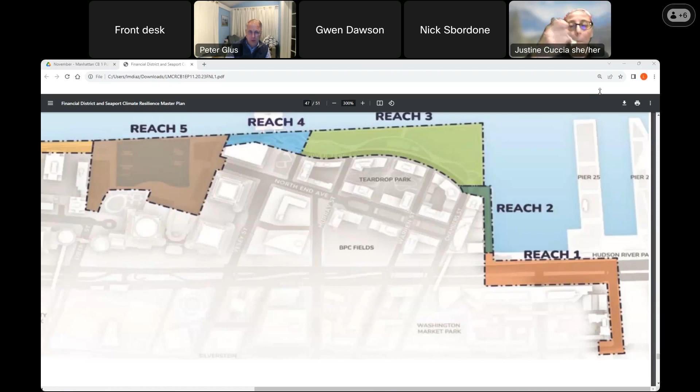I have a question, it doesn't require a drawing thankfully. Where are you at with the conversations with the developers of the Independence Plaza Tower? This is a large-scale building coming into our neighborhood, I think it's 900 feet, in fact I think it's considered the largest building in Tribeca. I understand they're interested to know more about what's going to be aligning against their property. Where are you at with that, and what are their responses to these plans? I assume you've been in conversation with them.

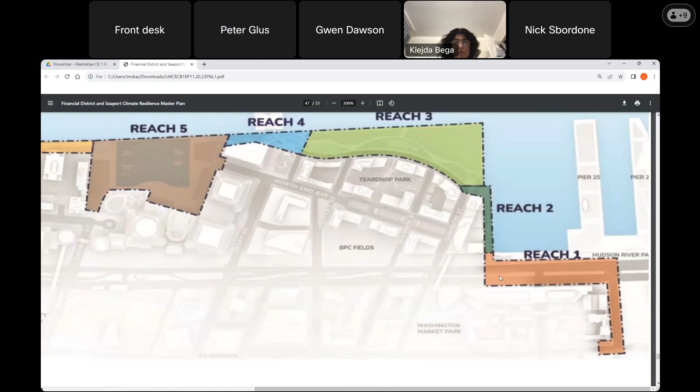That's fine, we were just trying to answer a question. Well, you know what would be great, Gwen, if you could just write the answer and we can put it in the minutes or something. Could we do it that way? Because it's late and I'm concerned about the time. So if that's okay, I'd ask that you do that. Yeah, it's probably not something easily put in the chat, but we will provide a written response. Yeah, written response, and that way everyone can have it.